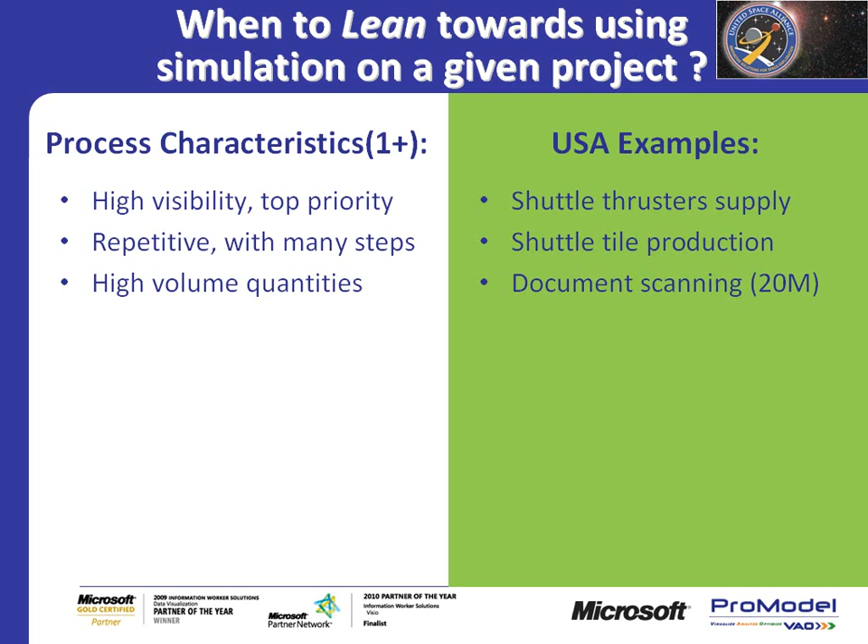If something has high volume quantities, it may be a good candidate for simulation. We had a situation where we had to scan over 20 million documents in a short amount of time in order to comply with some NASA rules. We didn't know how many people or equipment we needed, so we observed some scanning operations and built a model, which helped us predict not only what resources we needed, but also how long it would take. We used that simulation model and the results, and it ultimately saved us $250,000. More importantly, we met the NASA deadline.

Another process characteristic is something with a long cycle time, and this is another example I want to cite. We were building some prototype gun barrel parts for some DoD business, and we were asked to manufacture a large amount. We didn't know if it would take us 6 years or 6 months. So we built a simulation model, and we used that to optimize our use of all the process equipment and people. That helped us reduce the cycle time from about 14 months to less than 6 months. So again, long cycle times are good candidates for simulation projects.

If a process impacts many resources or has critical deadlines, again, those are all situations where you should really consider using simulation tools. The last characteristic I'll mention here is just anything tied to a Lean Six Sigma project.

In my experience, we began using simulation tools as part of our Lean Six Sigma effort. So we would look at black belt and sometimes green belt projects as possible candidates for modeling. We had a number of good simulation projects, especially a lot of paper processes, like requisition approvals or engineering changes. And so it was a great tool to use for our Lean Six projects.

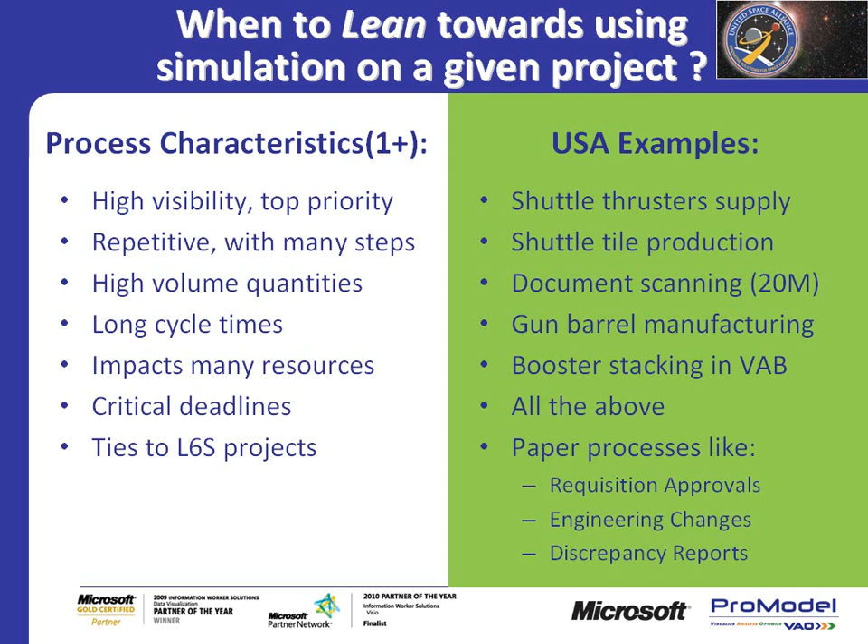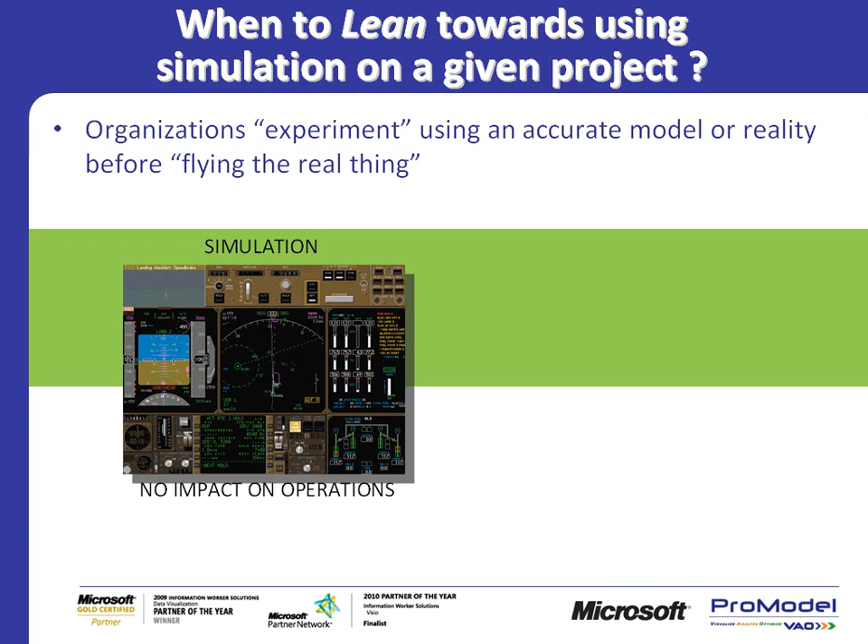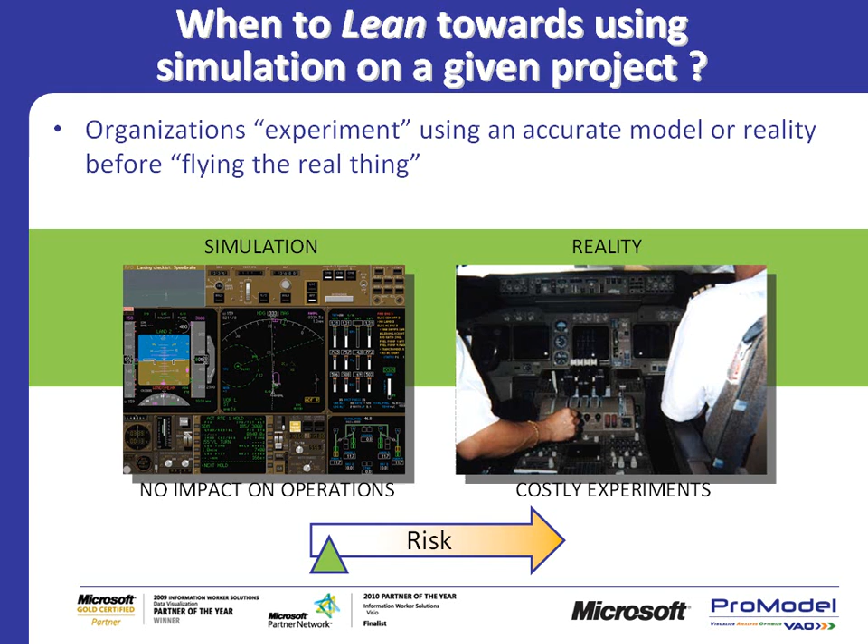Simulation is a great tool because there's no impact on your operations. There's no risk in using it. And so the ideal is, the more risky something is, the more costly, the more impact on your operations, the more it makes sense to do some simulation first. I don't think anybody wants to get in a plane where the pilot is trialing and erroring their first couple times flying. You'd much rather have them done a bunch of simulation before they got to pilot the plane. So that's the right type of application.

So let's do a quick little example of another real case study. Just some highlights: Evans Army Community Hospital in Fort Carson, Colorado. They have Visio and Process Simulator, and they were having some issues with their behavioral health patients.

Their walk-in patients were experiencing a really long wait time, over 120 minutes before they were being seen, and consequently many of them were leaving without being seen at all because of the wait time.

They also were having the medical evaluation board timeline for making decisions be 18 weeks, which was much longer than they wanted, and they were space constrained, so they couldn't just say, well, let's just add a bunch of providers and take care of it. It was not that simple.

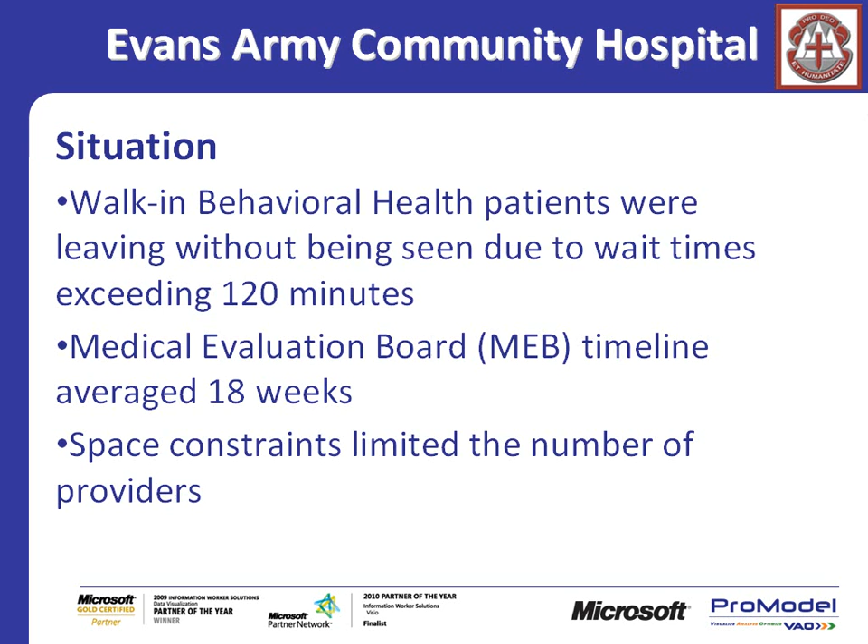So they needed a way to look at their system and determine what were possible actions and what would the results be. So they visualized their system. They built both a current and future state map of their situation, a value stream map. And the model was built in 3 days.

So I think at this point, Kevin's going to run this thing a little bit and talk to it briefly. Yeah, I just want to show a quick animation of the process in question here.

Showing some of the things that you can see, how visual this really is, showing the patients flowing through the system. I might be going a little faster, I'm not sure how the animation's coming through, but one of the other things you can see is that some of these resources, the doctors and nurses, are turning different colors. Green meaning they're in use, and red meaning they're unavailable at the time. So you can get some of that visual.

You can also see some numbers coming up here around the process shapes, and here they're all down. Maybe I can quickly get it onto the next thing. What it does is it shows you how many patients are kind of in process and building up. From a manufacturing standpoint, you might say work in process, right?

Here's patients in process. Some of the other things you can see are, as the patients exit, you get some statistics here on the screen telling you the total number of exits, how long they were in the system on average, and it gives you some good representation of what's happening.

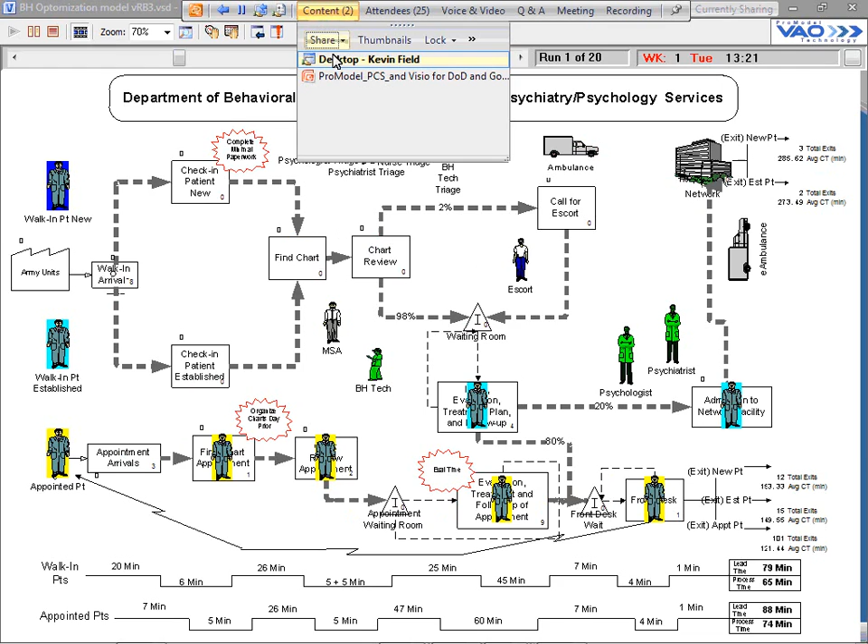So they built their model, and from there, obviously you need to do something with it. Building the model isn't the point; it's getting results and getting answers.

So in the analysis phase, what they were interested in doing was looking at sensitivity in the system, so you want to make sure you're working on the right situations. They used the model to help identify where the bottlenecks and issues were, and then take a look at, as people suggest changes, what the impact of those changes would be.

In this case, I know this isn't the best legible here, but what they were looking at, these are some data inputs that were used for the model, not all of them, but just some, and they were looking at their providers or their resources, so the psychiatrists, the psychologists. They were able to input from their actual data, the utilization, their current utilization, how they break down between the types of patients they were seeing.

They had data on how many patients walked in per day, the number of appointments per hour. They were able to develop some statistical distributions to help the accuracy of the model. So a lot of data that they had.

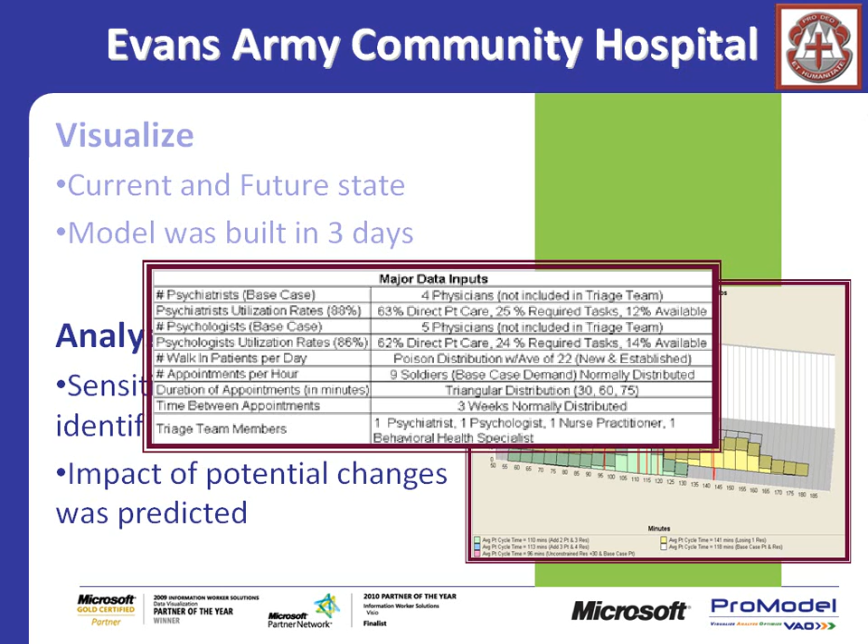Many healthcare facilities, and a lot of facilities, have a lot of data, but what do you do with it? So they were able to get that into their model, and from there they could run it.

Altogether they developed 10 scenarios. Here, this chart is an output chart that they developed with just 5 scenarios. I know you can't see it all that well, but the idea is there's 5 different colors here in the legend, different suggestions that people had as to what to do to help with their metrics. This chart happens to be an average patient cycle time chart, from the time they stayed through the waiting room, this happens to be the actual treatment time.

So just to look briefly at one scenario, we'll look at the light green scenario in the front here. And that actually turned out to be the one that they chose of the 10 they tested.

You can see that the left-hand side is the percentage of patients who had this experience. So, for example, 30% of the time, if I move over to my green line here, the cycle time was about 115 minutes. On average, for this scenario, which was 2 additional patients they were hoping to see per hour and 3 additional providers, their average cycle time is about 110 minutes.

So this is just one of the many things they looked at to help determine what changes to make. The last stage is to optimize. Once you get some ideas and start running them on the model, they came up with 10 altogether. Let's blow this up a little bit here. The one we were looking at in the chart just before was their scenario number 7, where they added 3 resources, and it brought the cycle time down to 110 minutes.

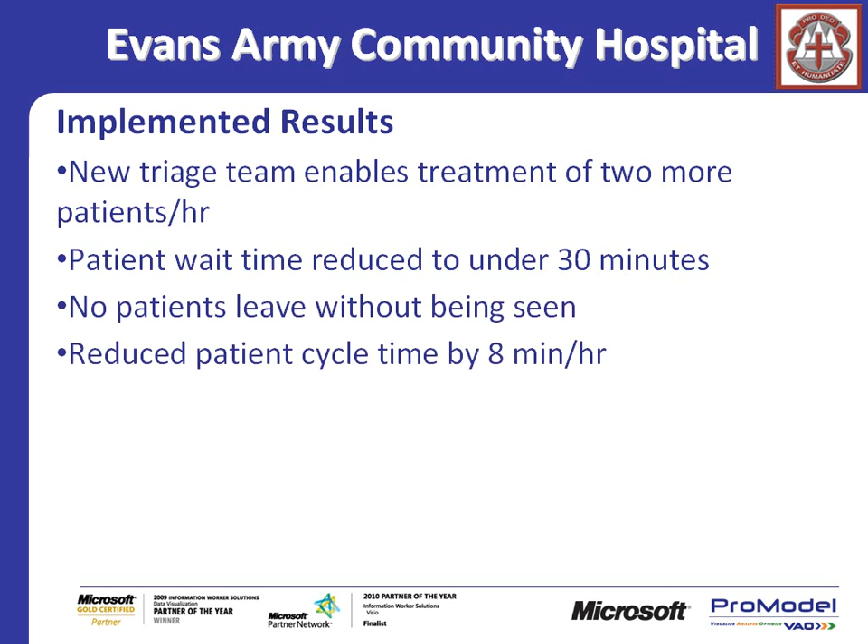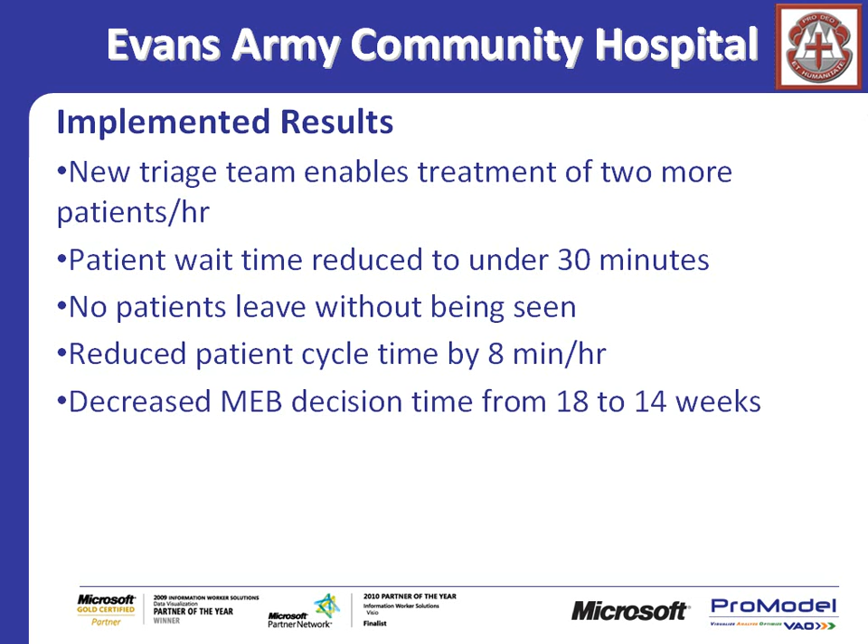Reduced the patient cycle time by 8 minutes an hour — that was in the prior chart. Again, you probably couldn't see it, but it reduced from 118 to 110 minutes. So they got that down as well. The MEB decision time, the Medical Evaluation Board, which they were concerned about, they dropped by 4 weeks. And they actually won an award from the TRICARE organization for this project.

So that's just one example of what one of our customers did with Visio and Process Simulator. Let's wrap up this front section a little bit before Kevin gets into how the tools work. Just some of the advantages that simulation and Visio technology can bring to any process improvement — it doesn't have to be Lean Six Sigma, any initiative. First of all, you get more realistic analyses because you're able to account for the variation and interdependencies of a real-life system.

You're going to be able to work on the right problems. You're able to do sensitivity analysis, identifying where your issues really are, because if you spend a lot of time fixing things that aren't necessarily going to improve the throughput of your whole system, this helps you pick the right issues out.

Low risk — we've talked about this a couple times already. A very low risk environment lets you test many, many solutions, more than you could if you were trying things out for real with your real-life systems, because we've got rapid visualization and scenario analysis capabilities. We like to refer to it as virtual Kaizen. For those of you who are Lean practitioners, a Kaizen event typically means going out to your floor or your ED and actually doing experiments. This will help you do a lot more experiments in a virtual world, which has a lot of advantage to it as well.

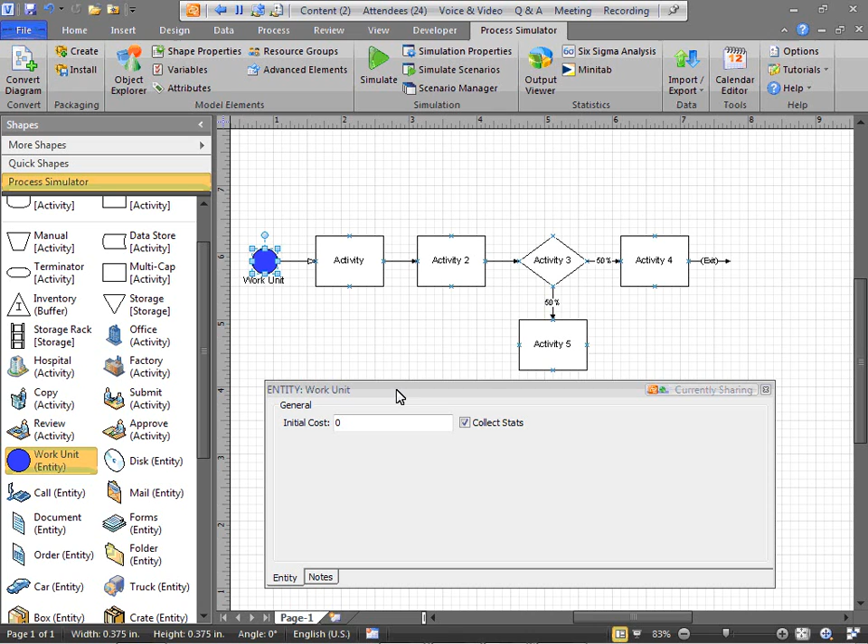You can get into defining how available that activity is, what percentage of the time it's available. You can add a calendar to it, do more detailed logic, set capacities of the activity, some constraints that go on there. You can define move times—the amount of time it takes between process steps if there's a physical aspect to it. You define entities, the things that flow through the system. In the case of the hospital, entities were patients, but they can also be parts, documents, and things like that.

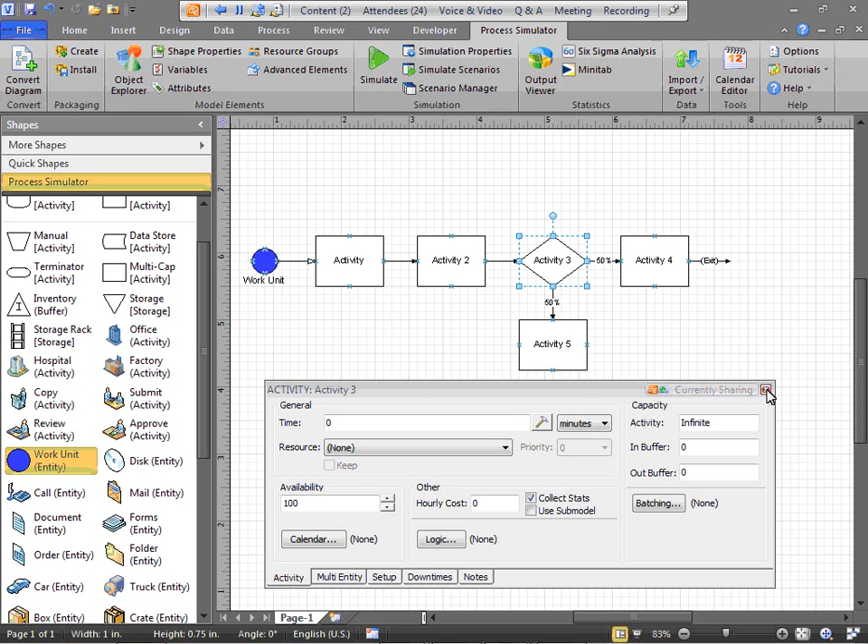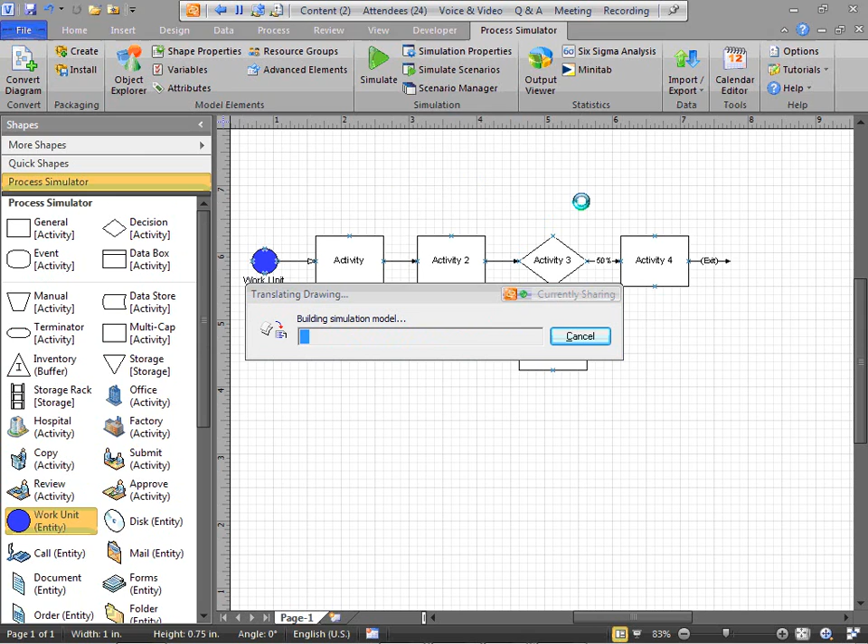So very quickly you can set up a model, change some properties, set cycle times, things like that, and be off and running on your simulation. We put some general default times and things like that in there, but immediately you can start to run it. I'll show you here just how quickly—I'll just hit the big play button, which is very difficult to see, and you can see immediately you can start to get some animation and some things there. I'm not going to go into the statistics yet.

Another thing you can do is if you've already got pre-existing diagrams, you can open it up in Visio. With Process Simulator installed, you can click Convert Diagram to a Simulation Model. What it does is go through and add all the default simulation properties I showed to all the shapes and connections in your diagram, and you can immediately hit play and run a simulation. It may not have much value until you actually go in and change some of those times, but you can take existing diagrams and begin a simulation project right away.

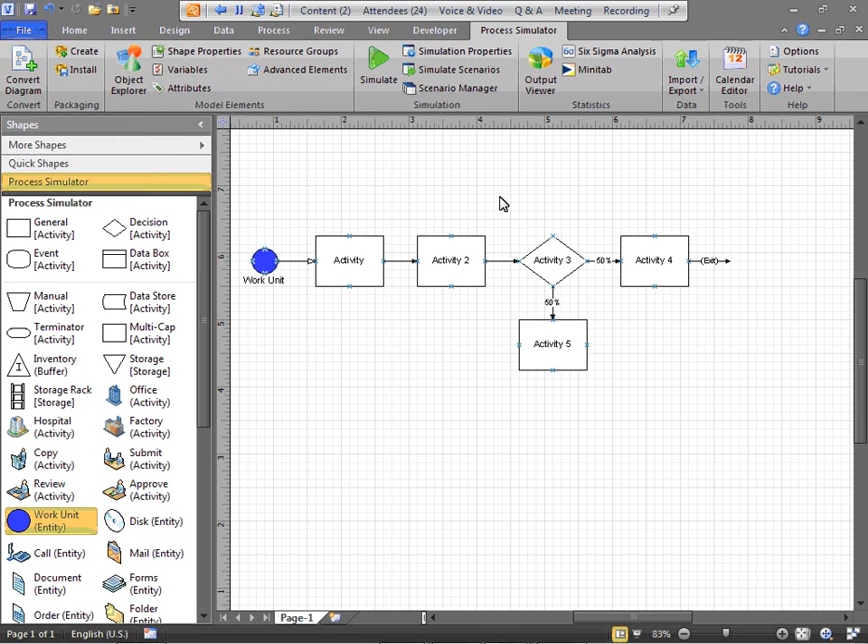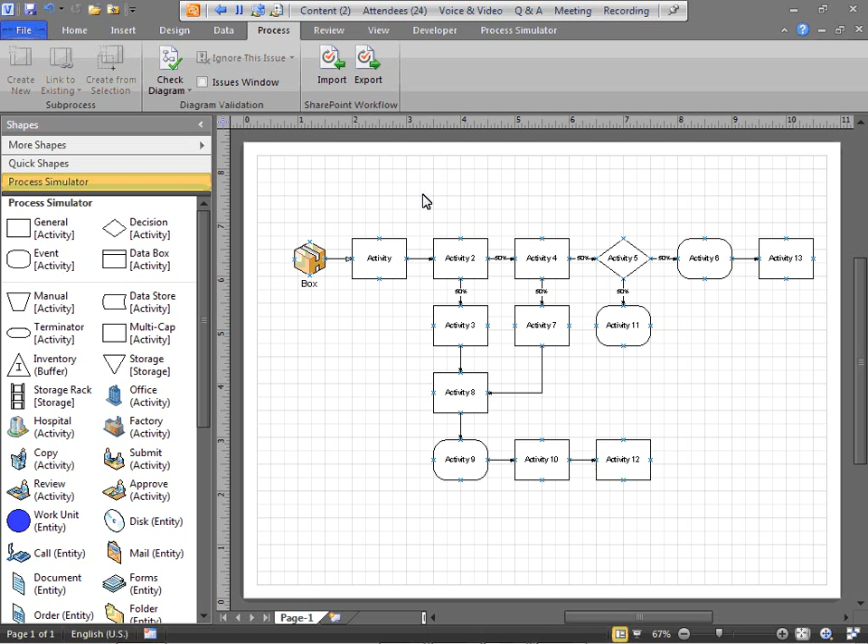Now, I mentioned with Visio Premium that you could take advantage of the sub-process capability. For example, this is a smaller diagram, but imagine one of your diagrams with hundreds, maybe 1,000 steps in the process, and you want to reduce or simplify that. Visio has the capability to create a sub-process from a selection of shapes. So let's say I'm going to take this whole process here, these steps, and include those in a sub-process.

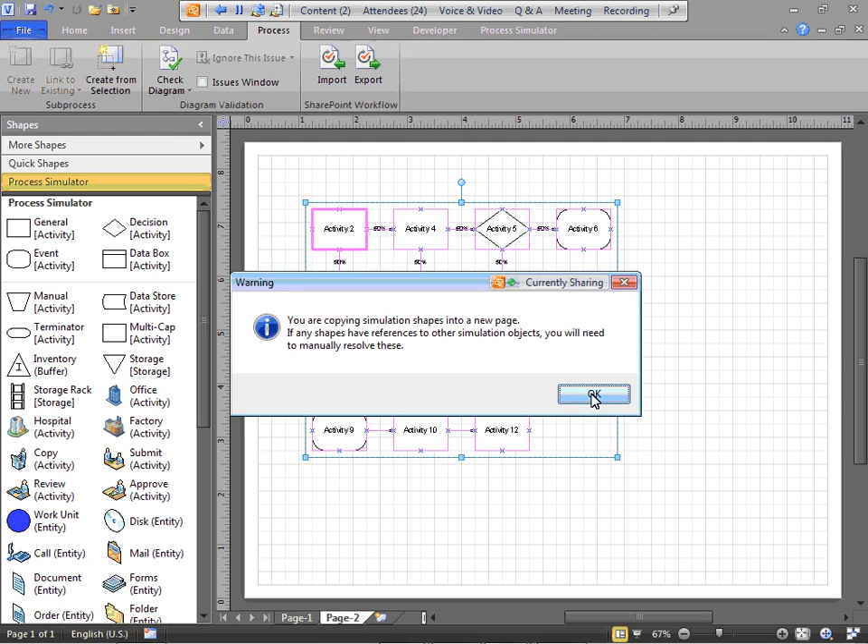All I have to do is highlight them, come up here to Create from Selection, and when I select it, it's going to take all those and immediately put them on another page. I'll get a little warning message saying I've copied those things over, and there's some references maybe to resources or other things that might need to be resolved. But back on the main page, it just removed all those things, healed the process, and inserted this new process step, which is a higher-level process step, and already created a link down to page 2 where it did everything.

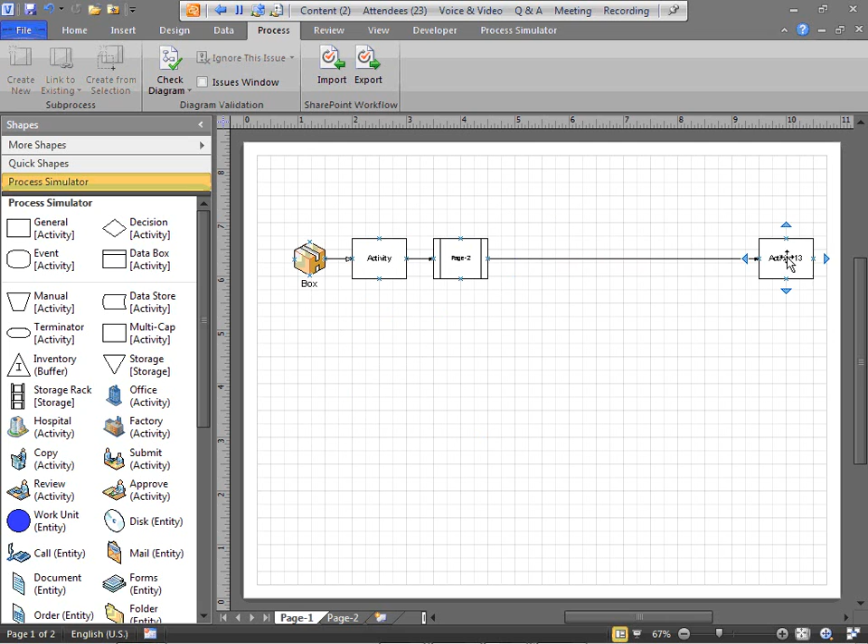So I'll do a control-click here as it shows... there we go, and it takes me right to page 2 where it has added and moved all those process steps for you. As you can see, it made it really nice. Now I can move this back over here, a little bit closer in the process, and that makes it really nice. Again, this capability is in Visio Premium. It allows you to simplify and organize your process flow, your models, into something that might be a little more manageable and easier to see.

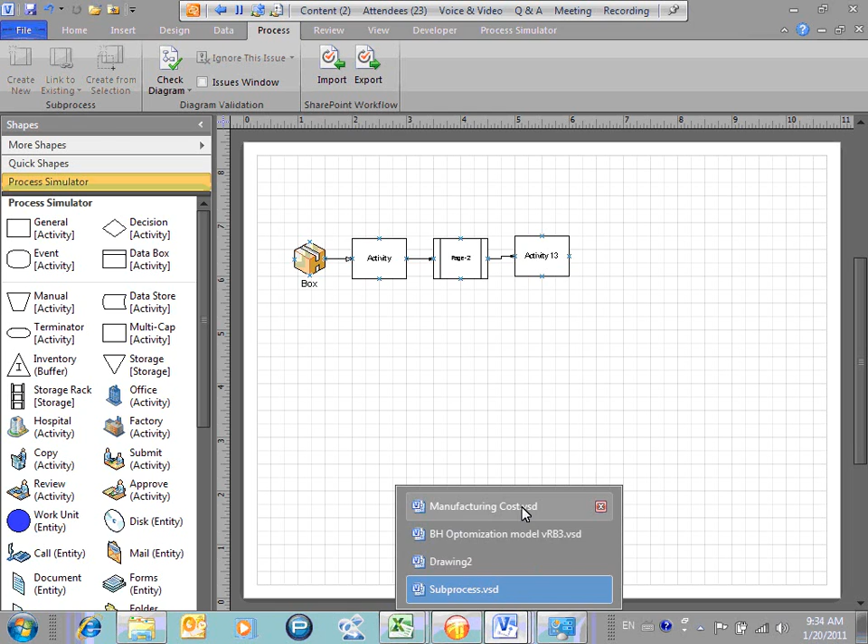Now, I also mentioned the data visualization and data graphics, so I have a little example here. This is a simple manufacturing cell where we have a crate of blank or raw material that comes into a receiving area. From there, we unload the blanks, and they're fed into a lathe where they're machined into a cog or type of gear. They go on to a degrease process, then they're inspected. At inspection, we have a decision to make: did it pass the inspection or not? For simplicity, if it doesn't pass, we send it to scrap, though you could send it through a rework process if you want. We then attach a bearing if it does pass, and send it on to shipping.

But I want to show you what the simulation can do for you here. First, I'm just going to run the simulation and show you results. Again, the little guy turns green, showing that he's in use. I'm going to turn off the animation so we can get right to the end, and click yes to view the simulation. Traditionally, we have a statistics viewer that comes up showing some of the things that occurred, some statistics, cycle times, things like that. This is where we normally analyze what's happened in that particular snapshot of running the simulation.

So things like, for the cog, the finished part, what percentage of the time was I waiting? I was there, but waiting, for example, for a resource to come over and start the process. What actual amount of time, percentage of the time, was I actually in process, or value-added processing time? And blocked means I was finished at my particular process step and needed to move on. I can see things like the total number of exits, the average time in system, and my average cost per part. I can see things about the resource, the percent in use—I was almost 91% in use—and some other things too. So you can look at some of the things happening in the system and do some analysis and say, okay, what do I want to change next?

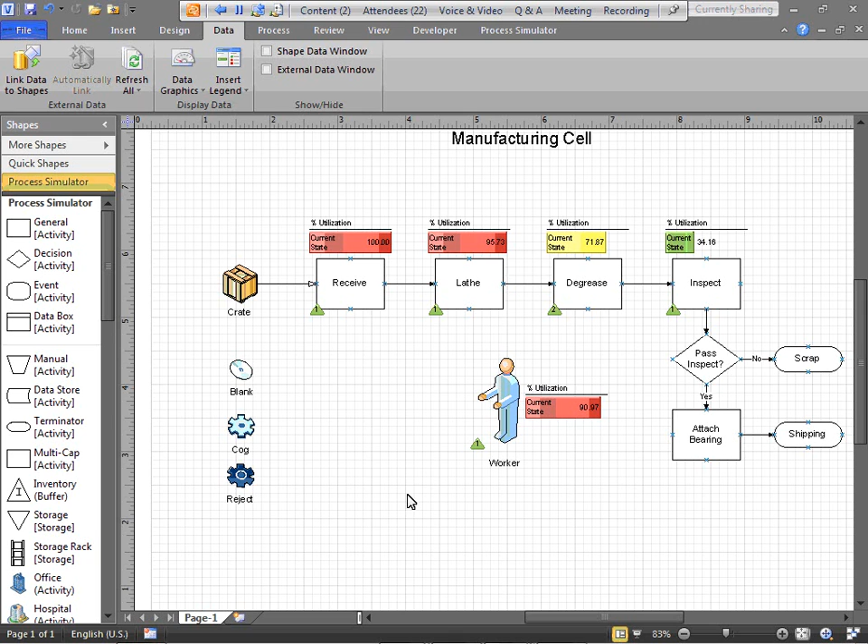Now, for any simulation model, you've got to have some purpose. It's great to see what's happening, but you need an objective. So for this particular process, our objective is going to be, for this particular entity, increasing our throughput and reducing our cost per part.

So now when I make changes, I'm going to run the simulation, and we're going to evaluate how those data graphics, how those statistics, change. When I look at the process, these data graphics show when I've got a utilization between 80 and 100%, they show up red. Between 80 down to 50, they're yellow, and from 50 and below, it's green, meaning I might have some capacity there that I can take advantage of.

Now, I look at my degrease station, and I see that I'm only about 72% utilized. So I look at the upstream process and say, what's going on here? When I analyze it, degrease actually can't start until I have 2 cogs there, so I only have 1 lathe feeding it. If I'm only doing one part at a time, that's going to bring my utilization down a little bit.

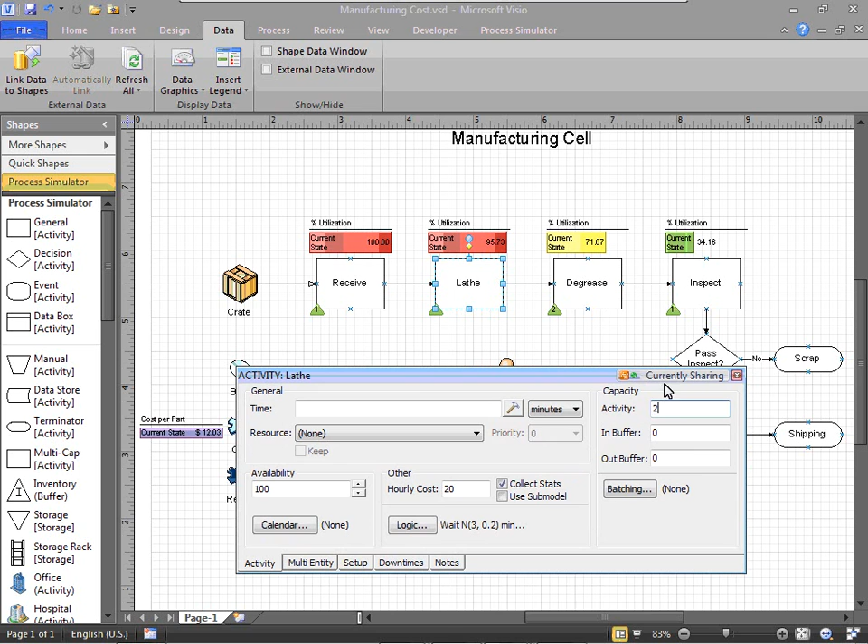So what I'm going to do is change the utilization - actually, I'm going to increase and say I want to try 2 lathes. If I have 2 lathes in parallel here, then they can both be feeding the degrease process or machine there. So I'm going to put 2, and then run my simulation and see what we have.

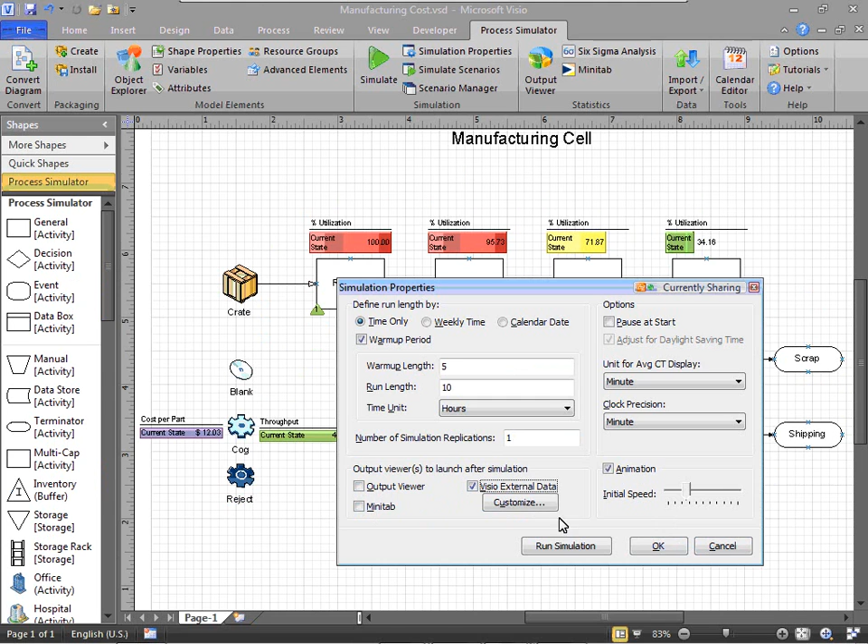Oh, I forgot to do something though. Hold on, let me go back. What I need to do to take advantage of this - rather than look at the results in the output viewer, I want to link this to some Visio external data. I want to click there. I could do both if I want, but we're just going to focus on the data graphics. So select that, run my simulation, and it's going to start simulating.

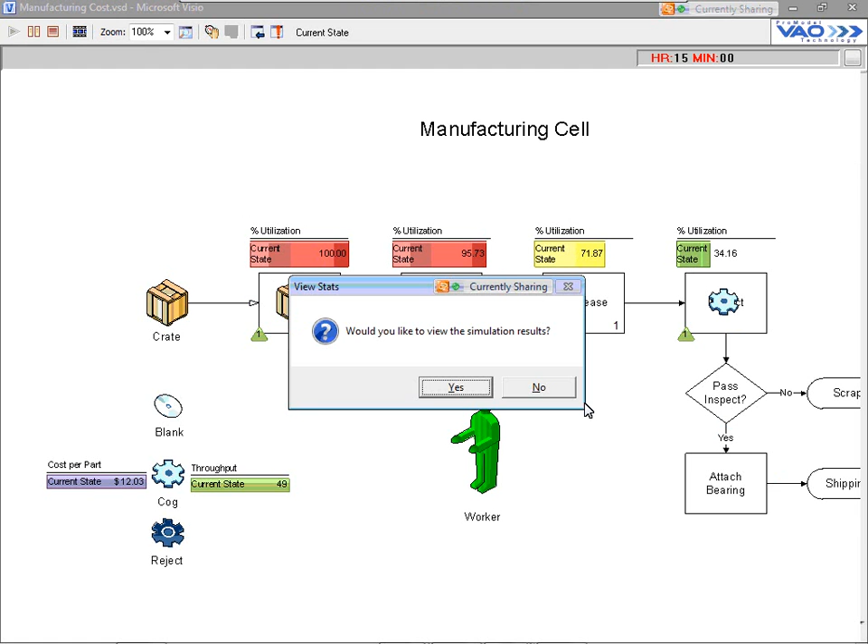Now, these are not dynamic - it's just showing what the previous values were, not dynamically updating. But if I turn off the animation and get to the end, then when I click yes to see the simulation results, it's outputting those results to an Excel file, which is linked to the external data linking capability in Visio, and then automatically linked to the shapes.

Now, what happened is you can see the utilization didn't really change too much. I'm still about 96%, and my utilization here is still about 72. You see some slight differences, but not much. If I look at my throughput, it's 48, 49, which is what we had before, but my cost per part went up. So obviously that didn't do too much - it just added more cost.

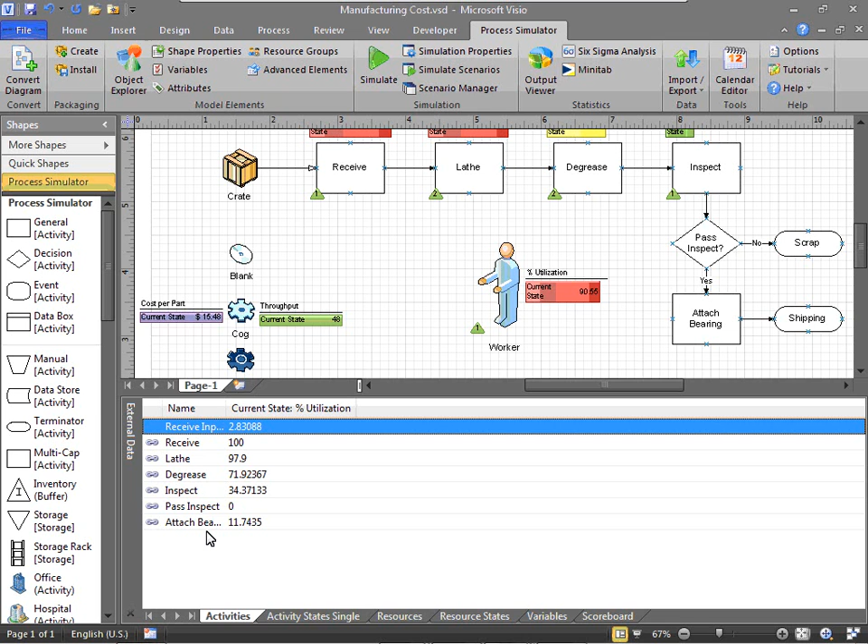So if I analyze the process a little bit, I can say, okay, if I look at lathe, I added another lathe, but really a worker needs to be at the lathe in order to actually kick it off and have it working. So I only have 1 worker - I need to add a second worker. I'll go in here, change to 2 units of the resource, and then let's simulate again and see what that will do.

I'll turn off the animation to get to the results. I can see there's been a change now. My utilization went up from 72 to almost 98%. My utilization at Inspect went up to 60%, but my resources went down to 80%.

That may be okay, since I'm not really modeling any break time or unavailability. Let's see what happened to our throughput. We went up to 86%, not quite doubled, but we increased quite a bit. And we actually reduced our cost per part down to under $12. So that was a good impact, a good change from what we made there.

That's nice. We've been able to do this and stay in Visio, without necessarily having to go look at charts and graphs. We've been able to see and visualize what could happen if we make those changes, and the results of those changes.

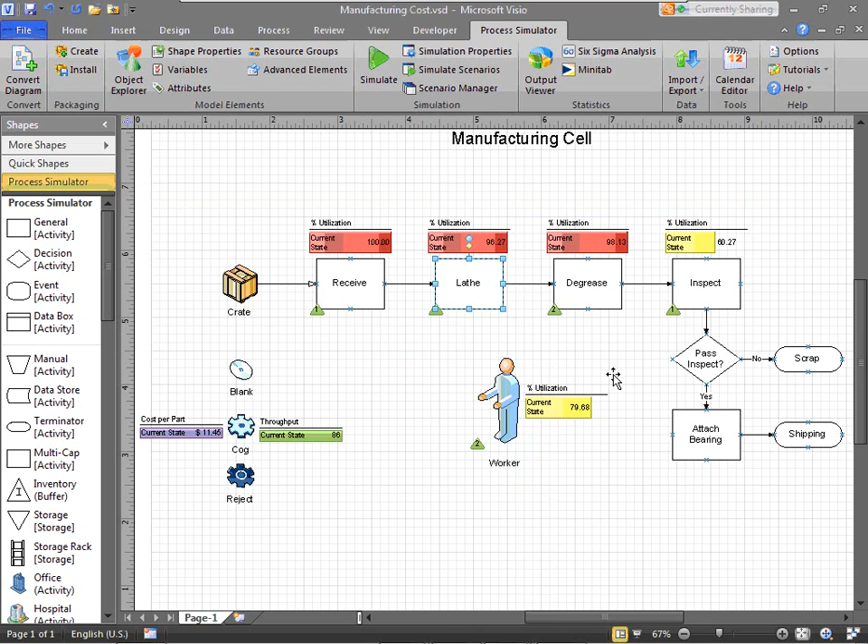So what I did was run a simulation where my current state was... hold on, I didn't have 2 units and 2 capacity, let me go back and change those. Let me get my as-is back to where I want it. Basically, my current state was 1 worker and 1 lathe.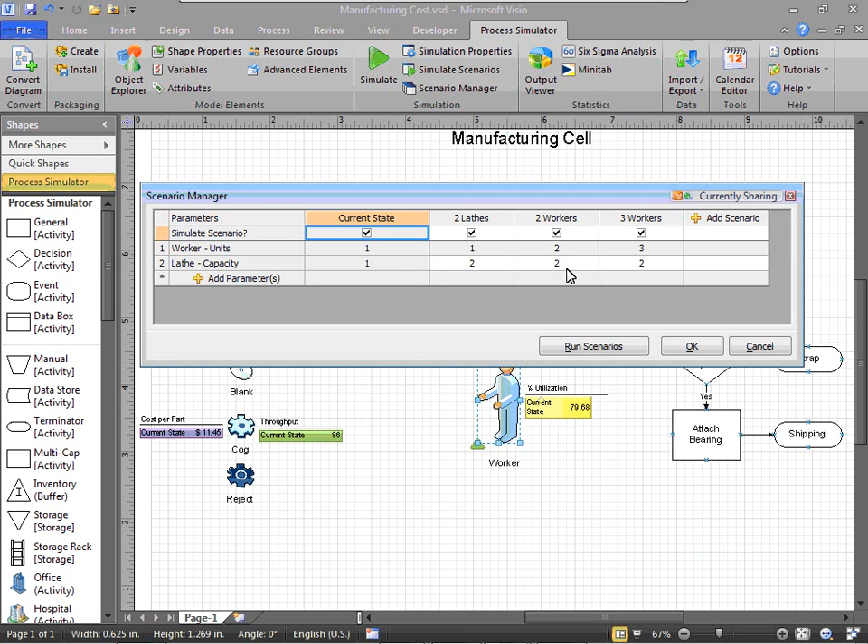I then increased it to 2 lathes, then tried 2 workers along with the 2 lathes to see what that improved, and it gave us some good results. Now, looking at our process, maybe we could try a 3rd scenario from our baseline, adding another worker. Perhaps that'll increase our utilization around the inspection station.

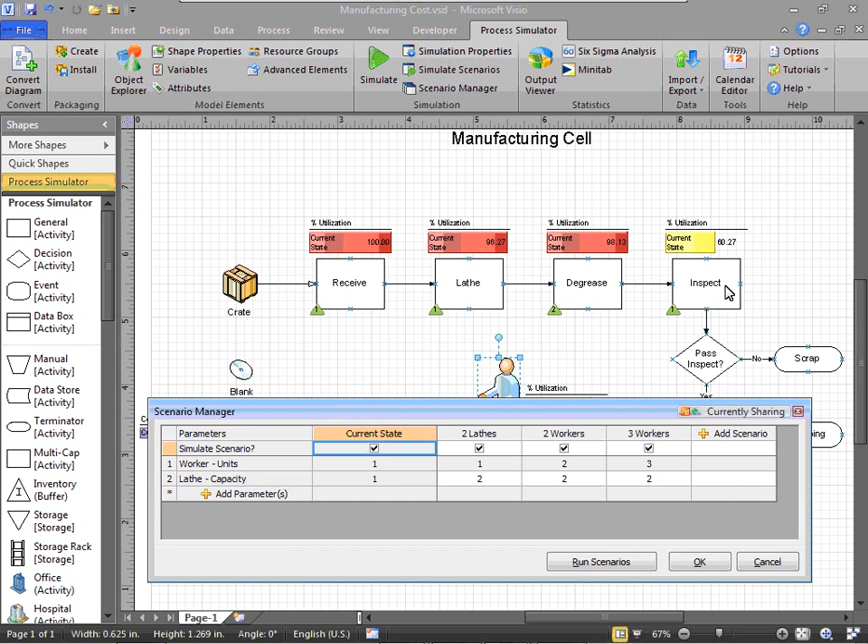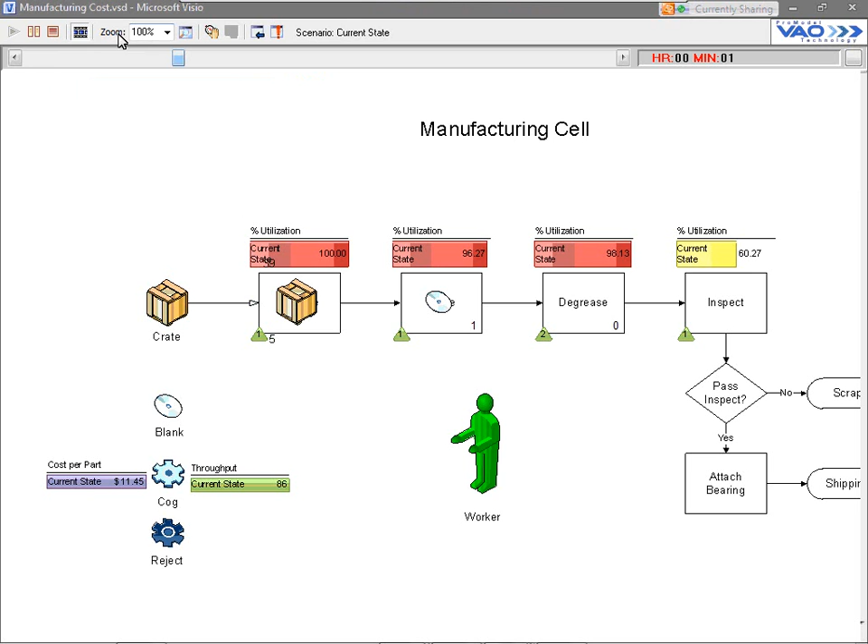Let's try it. I'm going to run all of these scenarios together, turning it off so we can quickly get through all 4 scenarios. It's going to collect all the statistics, put it out to the Excel file, and then push it into the data graphics so we can see all 4 scenarios and how they compare.

Here's my current state, 2 lathes, 2 workers, and 3 workers. If we look at the 3rd worker scenario, it didn't really make a change. In fact, it actually reduced our utilization to about 50%, which isn't great for our workers, and for our objective it stayed about the same. It didn't increase throughput or change cost per part, so that really didn't have an effect.

I'd probably remove that scenario. But as you can see, I can play around with different things and compare the different scenarios and results through the data graphics, all within Visio, without having to go to our output statistics.

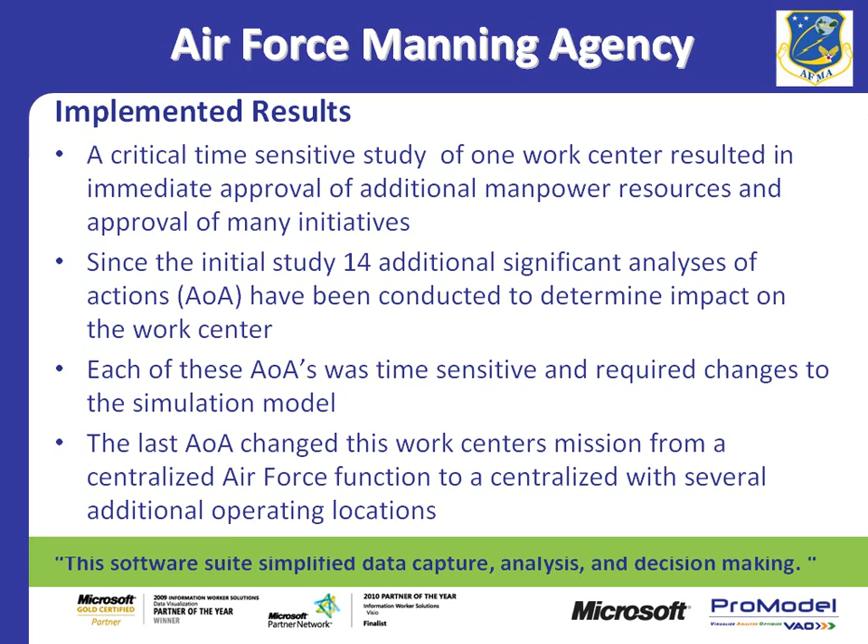Give you a little bit more detail on an Army Repair Depot project that was done. Their situation was this particular facility did refurbishing and resetting of equipment. This one model had to do with a water purification unit, and they were expecting their demand to increase based on all the activity that's been going on. So they were trying to stay ahead of the curve and see if they could handle their expected increase in demand. So their current state, they were able to produce or reset 73 of this particular type of unit per year.

They called it a 3K unit, and they were working basically 4 days a week, 10 hours a day as the schedule.

So they built a pretty detailed Visio map of the process and then converted it into a process simulator model to look at their baseline and validate that the model runs the way their system was running. Then their objectives were to determine their maximum throughput with current staffing, so what could they get up to with the current personnel, and once they reached whatever that max was in the model, what were their primary and secondary bottlenecks.

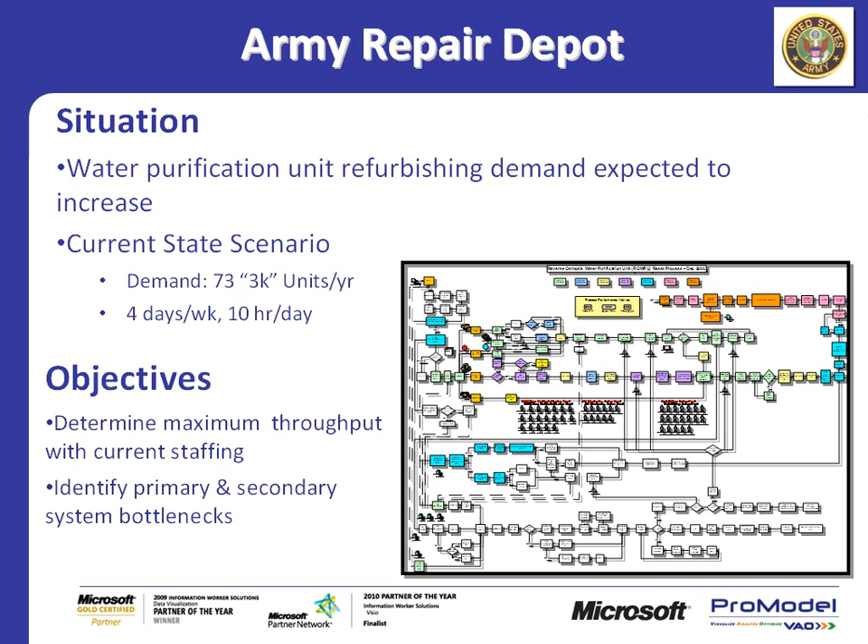That's one of the benefits of simulation. But overall, the cycle time is pretty consistent, so this reflected what they were currently doing. When they went to bump up the model to see what their capacity could be, they were only able to get another 2 units a year through before they started noticing their cycle time was becoming much more variable and sort of increasing at the end.

So it was slowing down. Somewhere there's a bottleneck in the system, and they couldn't get beyond 75 units a year really with the current situation. That was their one objective. The next thing they wanted to know was, what were the bottlenecks, or what would they have to do if they needed to get beyond the capacity? So they wound up...